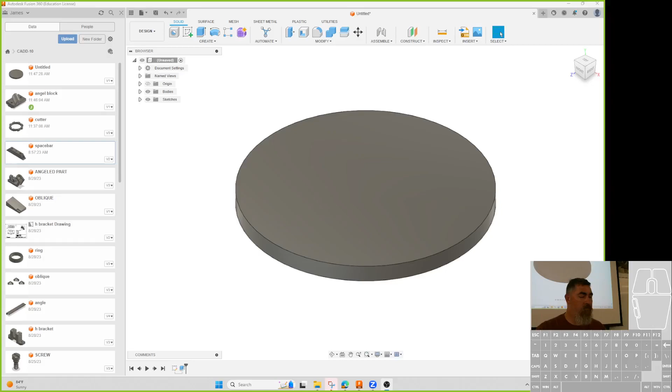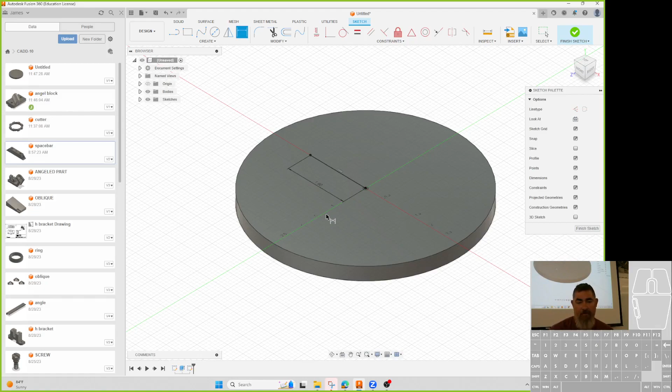So an easy way is if I create a sketch, and in the sketch here, again, I draw a line, because I like to use lines to figure out where my holes are going to be. And then if I just dimension this line, that's the radius of where the holes go, right? So I can say 1.8, whatever. Finish, drop my hole in.

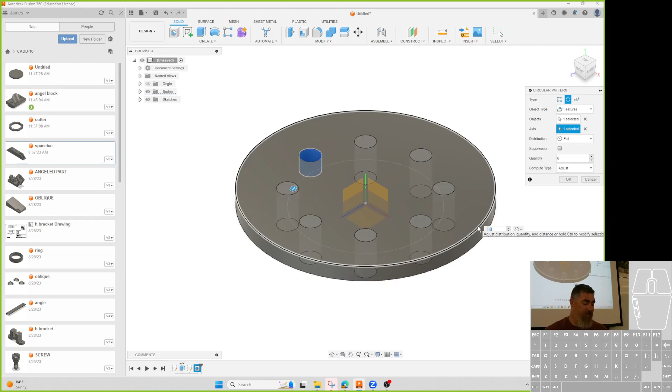And now I can do the pattern, circular pattern, pick the feature, pick my axis, and I can pick the center axis here. I could pick any round face or round edge, and it'll create a pattern around the center of that thing. And you tell it how many you want. And if you want to suppress ones, you can suppress and turn off that one. And then say okay. Ta-da. Circular pattern. There it is.

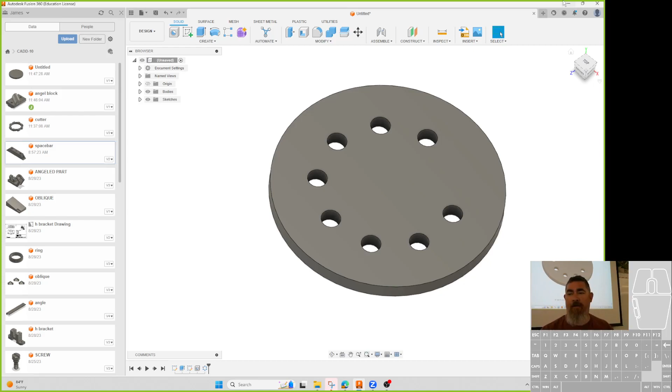So it's really the easiest one to use because you just pick the thing you want to pattern around. You pick the axis of where you want to pattern it. But with that, we can do a lot of things. And a lot of parts have circular pattern kind of things. So like this one, it's a hub. So it's got an outer diameter and it's got a hole going through here that's patterned around 18 times.

And so what type of view is this? Slice or a split. So a section view? Section. So we're cutting down right the middle of this part, and we're showing half of it. And so we can see that there's a nice big counterbore here that comes out to this point. That is 1905. Uh-oh. Which number do we use?

Smaller one? Whichever one you want. So I would stick to the one that's more round. Like I do the 905 for that one. This one I'd probably do the 55. Why not do the one in between? Because it looks like those are the upper. You could do that too. My thought is like the average. If it's separate by one, yeah, you can pick the one in between. It doesn't really matter.

And actually, maybe it might actually be better to draw the one that leaves the most material. So like on this one, if we draw it at the 946, that has more material. So if they accidentally cut too much, now we're still within tolerance. On these, draw it at the smaller size. So if they cut too much, the hole gets bigger and it's still within tolerance. Kind of depends on how you want to do it.

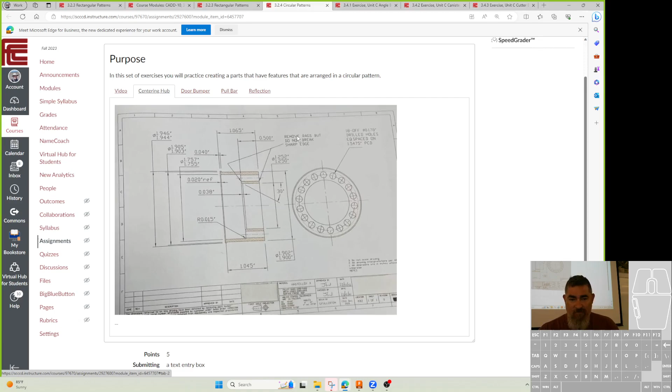Some people will always say draw at maximum material. So that's the dimension that leaves more material. So outer dimension is big, holes it's small. Some people will say always draw it at the middle. So it kind of depends on how good their processes are. Something like that. Looks like a spacer. Yeah, some kind of centering spacer hub thing. I don't know. So you can see there's a chamfer here. It's 30 degrees.

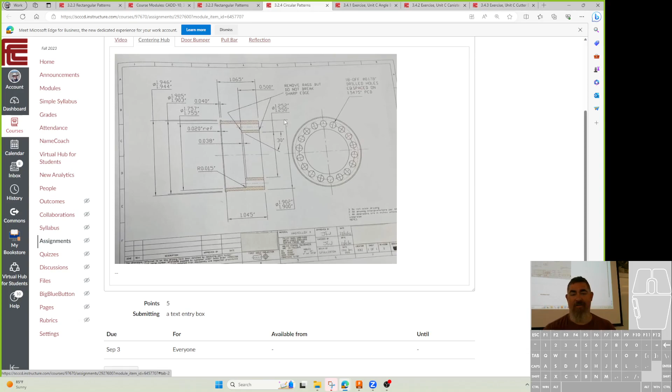The sizes. So I put this here so you can kind of have practice seeing the kind of drawings that are out there in the real world. You might see something like that. That breaks some of my rules about dimensioning things, but that's the way it is.

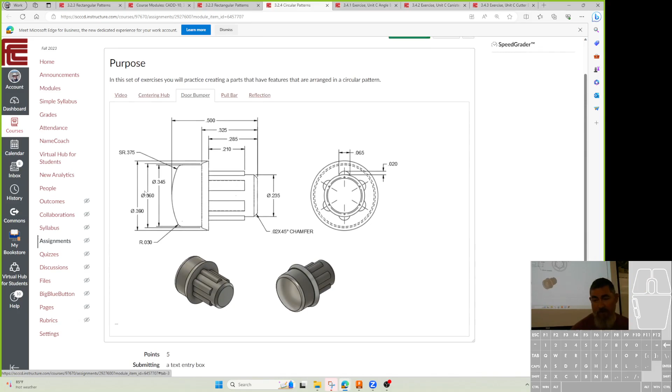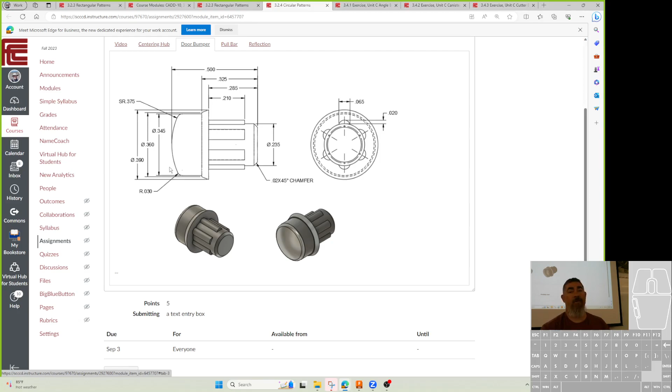Okay. So we have this little door bumper piece here, and I have it somewhere. This is for like the barn door kind of doors. There's a little block that stops the door from opening, and this is a little plastic bumper that goes on that. And so, kind of combining some of the stuff we've done before. So that dome here, the little taper here, and then these pieces that need to be extruded up and patterned around it. Okay.

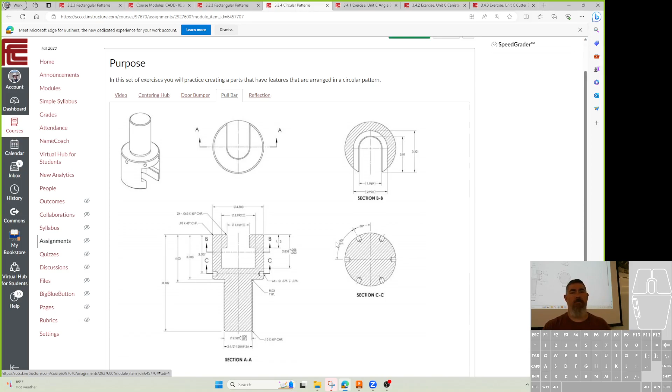So there's this one, and then this thing. So you can see instead of patterning holes around on the main face, now these ones are going around the outside of the part. So how do you make these holes here? How would you make the first one? Tangent plane. Yeah, you need to start with a tangent plane, right? Get one of those in, and then pattern that hole all the way around. Okay. Questions on any of that? So just kind of different ways that it's used in there.